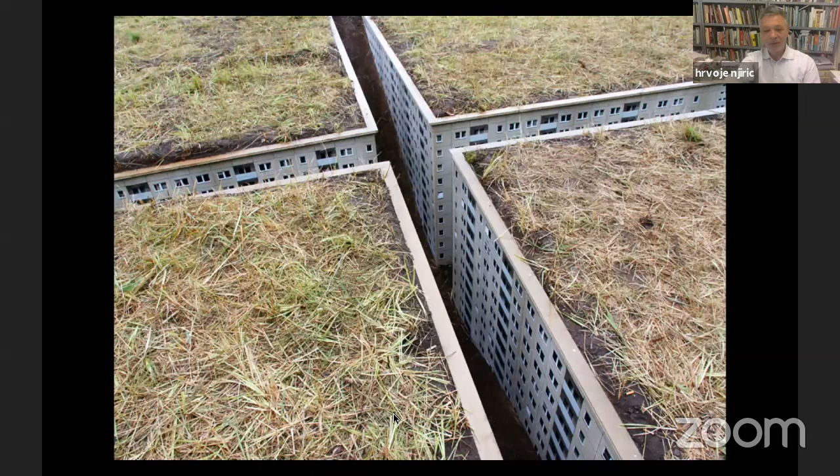These are some works by some German artists who wanted to argue this thesis — that we should be well aware of the scale and that we shouldn't be misguided by the level of elaboration or detailing.

Scale also participates in a public domain. This is the commercial for Unicredito Bank, called Zagreb Bank in Croatia, which gives us a clue how to participate with this small-scale environment of a living room within the public domain. Especially today it becomes very actual, because our living room becomes part of the public domain — you are all now sitting in your rooms, participating in this public debate that we are conducting today. So this idea of small and big, public and private, somehow comes together by virtue of electronic means.

So this small-scale intervention in the city also seemed to attract our attention, and we as architects should be well aware that we can also deal with this small scale.

There are some excerpts from some websites which I find very attractive in terms of stirring up and awakening our attention as architects to the different levels of perception and to different scales and measures. They are not necessarily connected only with Japanese culture, but also with other surroundings where public and private come together, and the idea of different programs that could somehow be combined.

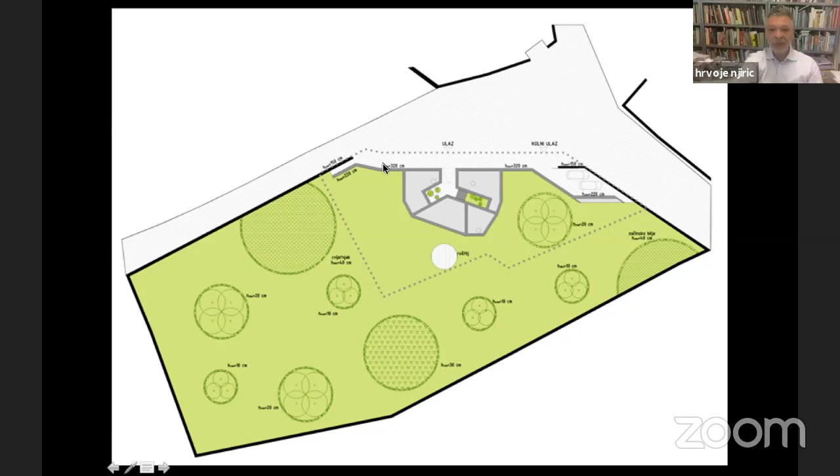So this is actually the site, and we surrounded the site with a stone wall and proposed a house which can be done in one line. You see one line of the stone wall coming here, here, here, here, and also creating ambiguous spaces—those facing outwards, those facing inwards, and so on—all capped with a roof.

So this is the idea of his writing room and some other purposes that you can enjoy by the idea, but doing just one line, just one theme. This is, as I said, a very simple project, but a certain richness comes from this simplicity and how you articulate it in terms of materiality.

So this is the idea of this house. I hope you can see it pretty well in the model now, and with some ideas how the roof might look like. Another example is a little satellite town nearby Zagreb for a little commercial center.

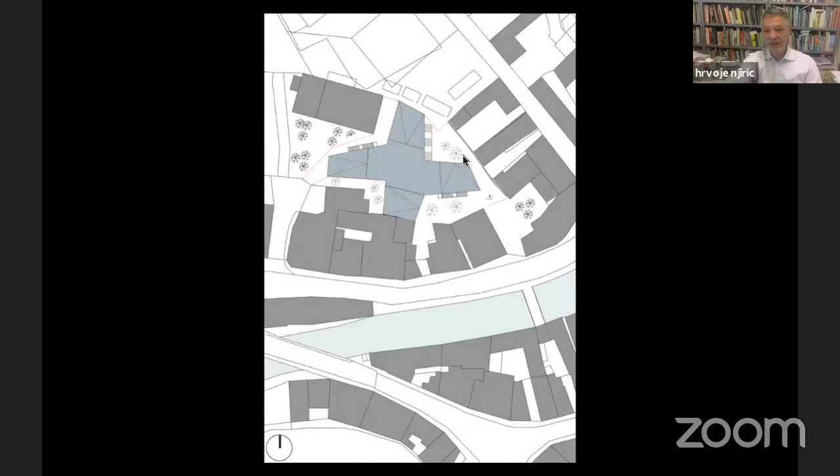Here it was important also to go into this very particular scale of this 19th century city. So we were asked to do this little commercial center, and this is the way how we reacted to that, with these 3 volumes, somehow interpreting the nearby tissue and forming a kind of a public platform for different gatherings in between. So this is how this structure looks like.

Then a project for a church in Rijeka, Fiume. We wanted to also deal with things called everydayness. And this is an image of a church that was made after the Homeland War that we have in 1995. This is one of the nicest examples that we have.

I think this is a very important reading for the students to recognize the beauty of this structure, because it's all made prefab, all made with auxiliary means, but the hierarchy is there, the cross is there, you have the main nave, you have the side naves made of containers, of course. Everything is reduced to this Christian poverty, which is prophesied.

And you have the basilical lighting, if you want, right? So the whole vocabulary is there. It's very simple, it's very straightforward. It's not pretending to be something which is not.

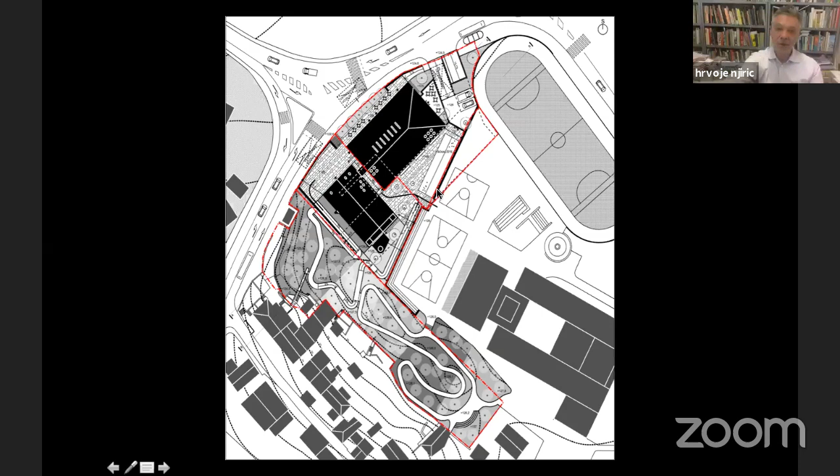So by knowing this, we entered the competition for a new cultural center, like a remodeling of the existing house in Fiume. And this is the project for a new church, somehow forming a kind of ensemble with a public space in between and the passage and so on. So this is how we articulate this very simple archetypal volume in a kind of interplay with this cultural center as a very simple, straightforward structure.

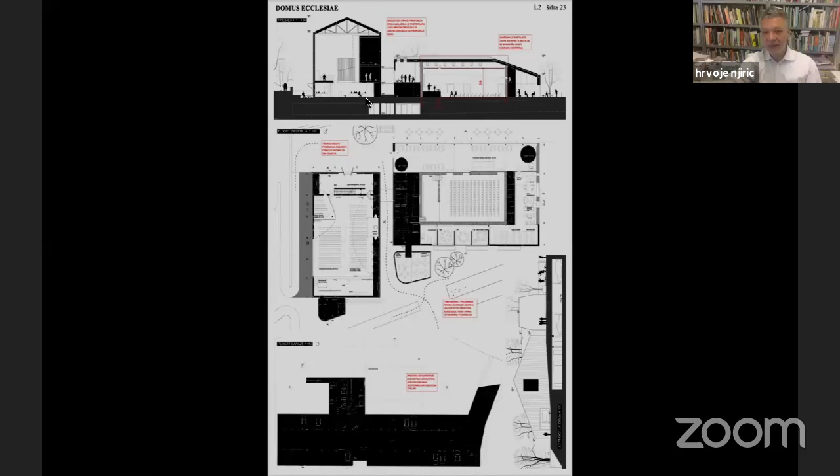It was important that we needed to include the spaces for education of young people within these premises, which are relatively small scale. So we included it on a balcony. You can see this balcony here, which somehow cantilevers the whole interior of the church, which was somehow a shock for the priest. He wasn't really expecting that, and it produces a kind of dynamic space in interior.

So this is the idea of having an archetypal volume and then remodeling it according to the needs, also forming certain areas that have different scale from the ground scale of the whole house, or this balcony for the singers and so on. So these are some images of the interior. Some more drawings. You can see these two forms invading the archetypal rectangle of the church, and with this straightforward, very simple detailing of the house.

So this is the idea of this Sunday morning where everybody comes. Of course, nowadays you cannot see it like this. It was a big debate in Croatia because some of the priests for the Easter opened the churches and didn't want to listen to the bishop or the pope or the politics.

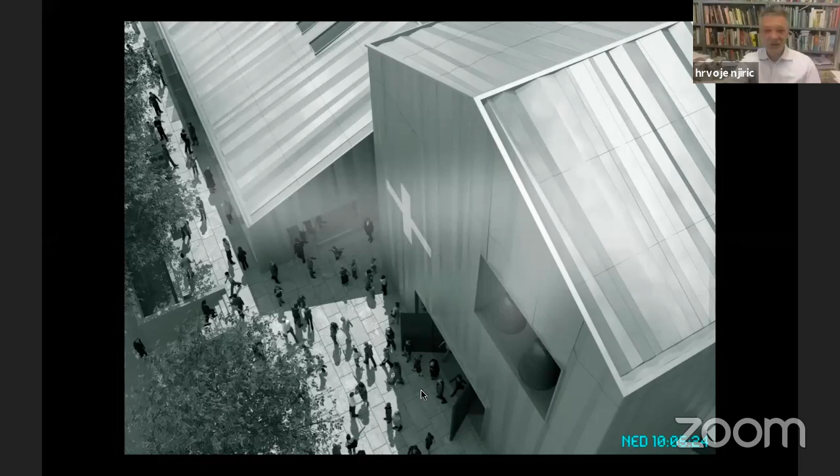They just opened the churches and said who wants to come should come. So this was like a kind of big polemic whether they are doing it right or should they somehow be loyal to what everyone else is doing with this social distancing. But we'll see how this debate is going to end. Anyway, these images will probably be possible sometimes in the future.

Little intervention, also a small one in Zagreb. Here is the Academy of Fine Arts, and they wanted to make a little gallery here. So most of the competitors... it was a nice competition where we were told that Peter Zumthor and some Spanish architects...

Let me remember his name, I cannot remember at the moment. Anyway, it was a competition with good jurors, and we did a lot of effort to make it nice. However, the end of the competition is not so clear how it ended. Zumthor didn't even appear, so it was somehow left for some local architects to decide.

So this is the gap, right? So the most immediate reaction would be to close the gap, right?

But then as architects, we should somehow not forget, and I think it's also very important that I keep telling my students always that our foremost duty is towards the public space.

So if this is the main street in Zagreb, we studied a number of such gaps along the main street and said, okay, this is a chance to make another little public space and to move the house towards the internal part of the block and to make the passage which is necessary for the vehicles and for the pedestrians.

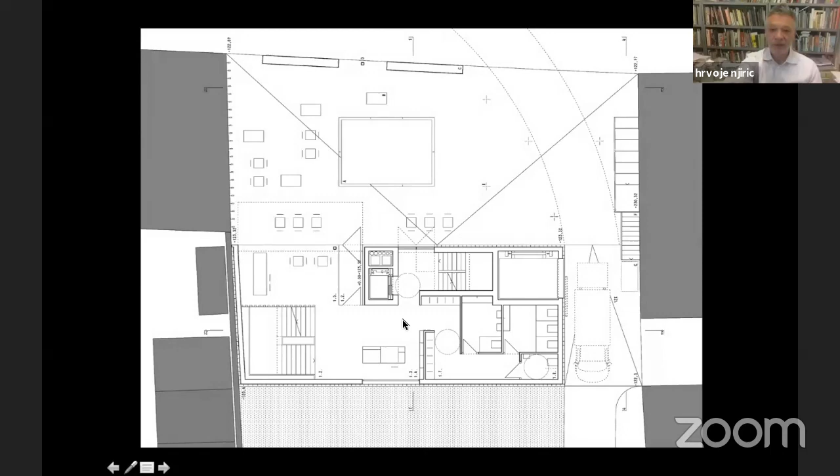So you will see it in a moment. This is the appearance of the house towards the street, or more like this. As you can see, it's entirely like a kind of monolithic volume, like a Stanley Kubrick one, for example, but made out of brick, which goes from dark into light or dissolves in the air.

I'll tell you something about it just now. This is the section. We made a pretty big 1:50 scale model for that. These are the lower galleries. You can see the gallery from this public space, and the other galleries go on across the floors.

So this is this outward part of the gallery, which somehow mediates the arts towards the public domain, which is also a very important issue in arts today.

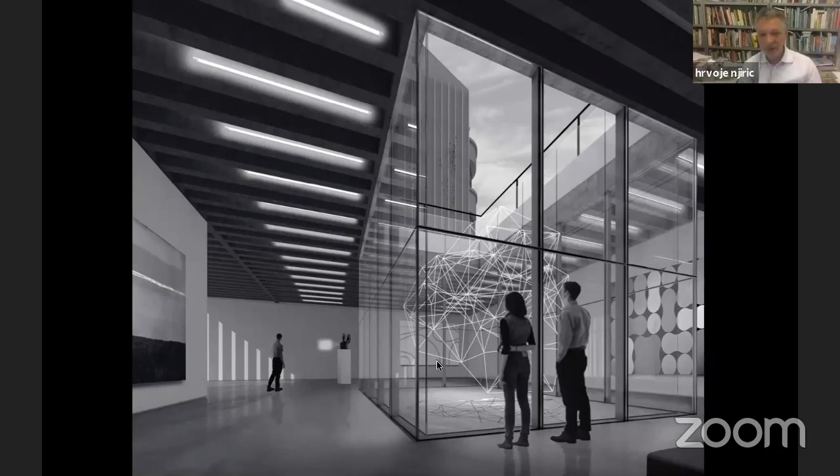So we made a very simple, as Giovanni was saying, a very simple but somewhat complex gesture by making this mute brick wall here, just with a little notion of the entrance here, and with this sort of sunken patio with some sculptures, like an invitation towards the inner inside volumes, and also giving the light into the sunken galleries.

So this is about this wall, the simplicity or the beauty of this brick wall that we wanted to manipulate with this calcium substance, which goes out of the brick. So we studied some chemicals to get into this sort of image from 0 to 100.

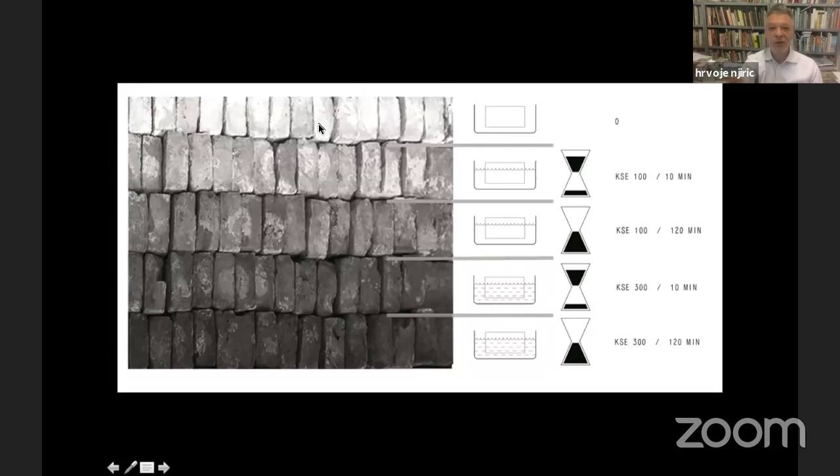And we manipulate with different ingredients, the brick, to have it as it is in this red-orange tone, or to stimulate or to use less sealant to make it more with this white calcium coming out of the brick. So this is the idea of having this gradient by manipulating this very material of the facade.

So this is a kind of a parallel story to the main one related to the public space and articulation of the exhibition space. This is the view from the block towards the outside, towards the street. And this is another image of how this entrance might eventually look like.

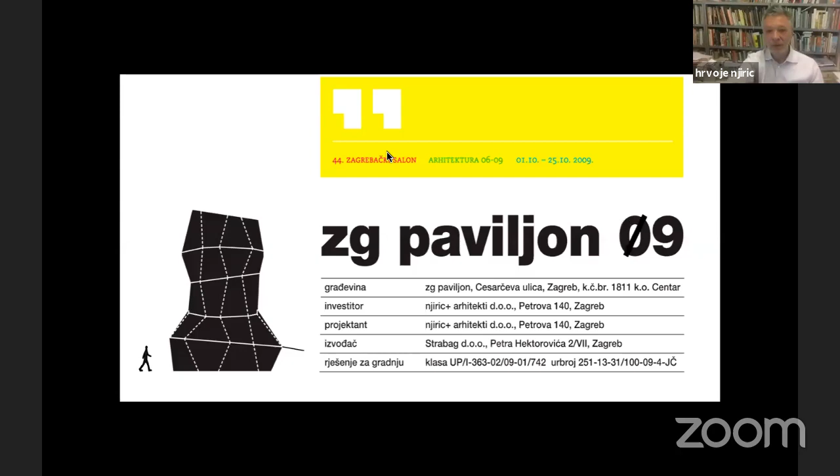Okay, another small project, a pavilion for the vicinity of the main square in Zagreb. It was a pavilion for our Triennale in 2009. So we call it ZG Pavilion 09. This is the position. This is the main square that I have already shown you, and this is the little meadow where we put this pavilion.

This is the position, just looking over to the main square. On the other hand side, towards the cathedral, these are some models.

This is all based on the film by Buster Keaton, 'One Week,' about this monstrous house that happens, where the jealous ex-lover doesn't want this couple to have their new house, but he changes the number of the boxes before the assembly and makes this monster in the end.

So the question is, who changes the numbers on the boxes in Croatian architecture? What is the future of Croatian architecture at all? So by answering these questions, we decided to make it out of two most despised or hated materials, that is rendered extruded polystyrene and plastic windows.

So this is the polystyrene field, this is the plastic windows. We'll make the house with these two materials only, and make it so that none of the windows are alike, giving it this sort of shaky atmosphere.

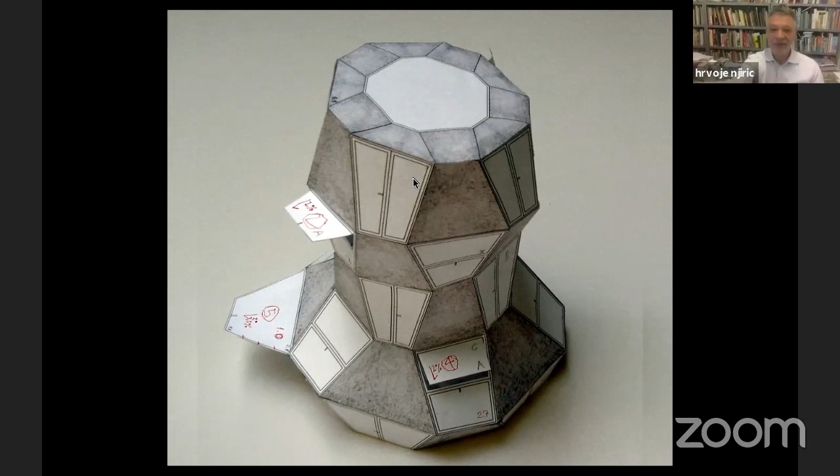It is like a kind of a little tempietto. Bramante comes to mind when you say that, right? So these are some working drawings.

So this is the assembly process by steel construction and wrapping it in these plastic windows and this XPS material.

Towards the final one, you see its view from the main square. It was a temporary pavilion.

It's also a very important device and strategy in architecture that houses should have a certain duration. This number T, time, is very important. I think students should pay a lot of attention to that point, that some of our houses have a very limited duration—in this particular case, 3 months—while in other cases they're meant to last forever. If we take Adolf Loos, he says only tombs and monuments are meant to last forever, and everything else has an expiry date. We should somehow see it in that light.

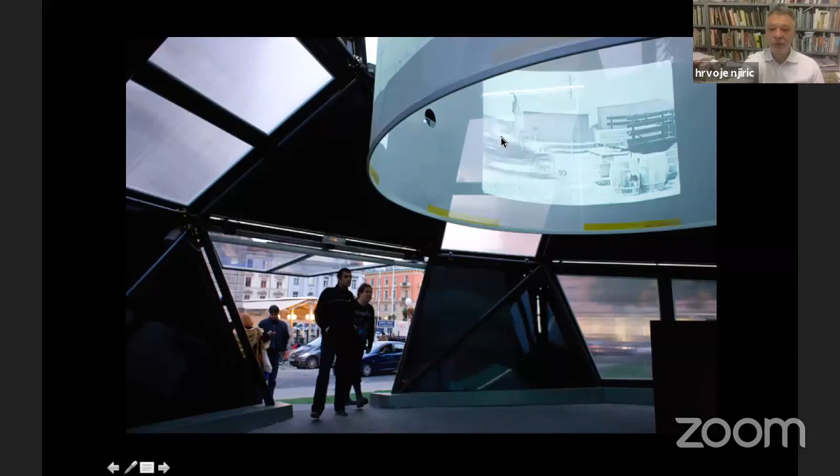Some more images of this house sitting peacefully in the meadow and also housing a lot of public and artist events over these 3 months. A movie by Buster Keaton was also shown in this cylinder, which is inserted into the central part of the building—this kind of pulpit with a sacral appearance, this centrality of church-like spaces, quite intentionally done. There are some nice images of this abstract volume with shadow and light in the height. It was a pretty successful public event in 2009.

Medium scale—we have to hurry up. This is our campus in Split, where I teach. This is the Faculty of Architecture and Civil Engineering, and this is the other part of the campus with this 1970 idea of a new Split, a new Cardo and Decumanus, following the Roman centuriation.

This diagonal part extends all the way here in the planning. Our site for the new law faculty was supposed to be here. It's still in negotiation, still in the process. The idea is that we should somehow articulate the borders with some additional programs, and this is the position of the house.

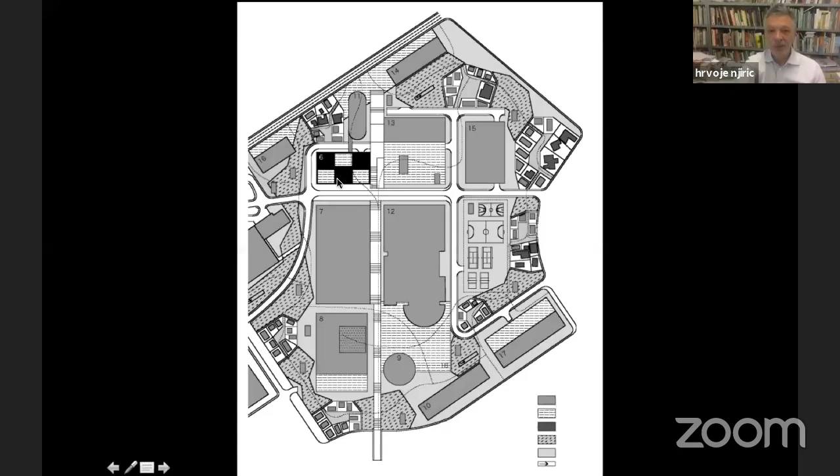Another lesson for students: when you design a house, try to look a bit beyond the limits of the site—make the local border conditions clear before you enter the program of your task. This is the idea: the house with 3 courts, secluded like a version of a Terragni-like space, with shifts and modifications of these internal courtyards across 3 pavilions.

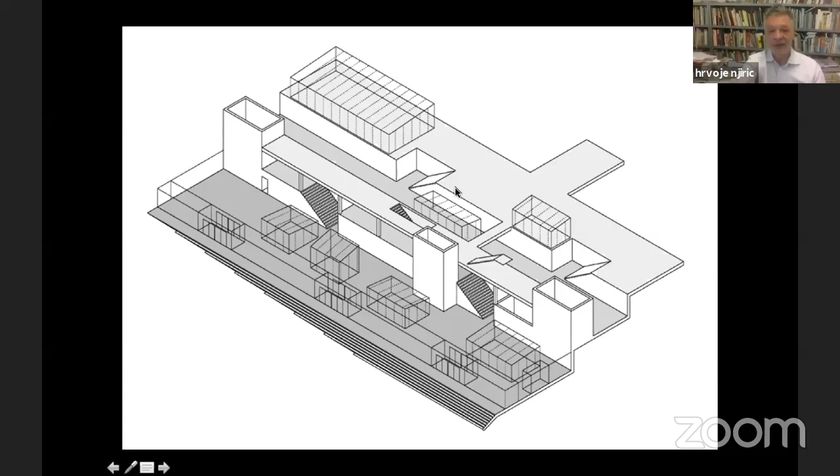Some references for that—I don't want to go into detail now. Some images of that central staircase, which is very important because the site is sloping. So our foyer happens on 3 levels—1, 2, 3. It's a stepped foyer, and you can see it here.

Within the house, with this public domain carved into it, we see this height difference. This is the idea of introducing public space and gradually progressing through to connections with the next faculty, and so on. There are some auditoria cantilevered into the free space of a courtyard—you'll see the plans.

There are some arches, which are very popular in Croatian culture. Every tourist worker wants to attract guests—maybe not Italian guests, but someone keen on seeing the arches. You have a lot of them anyway, so arches happen everywhere and are part of popular culture. We thought, let's deal with these arches—let's do something with them.

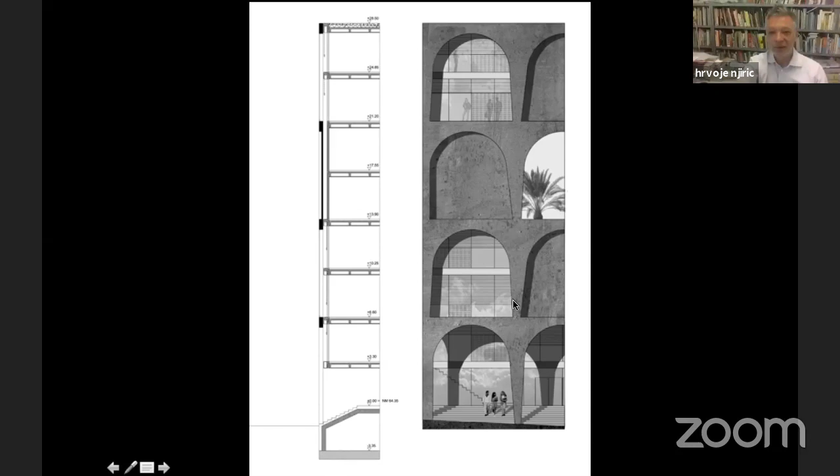First, we made them double height, slightly deformed them, and filled them with different fillings. The lesson is taken from the Diocletian Palace again, where you see Roman arches, 20 centuries old, alongside modern interventions—how the wall was actually remodeled while still retaining these powerful arches as a framework that gives a certain freedom in design. Even the AC units don't compromise the integrity of the whole structure. This was the idea, and this is the most important diagram.

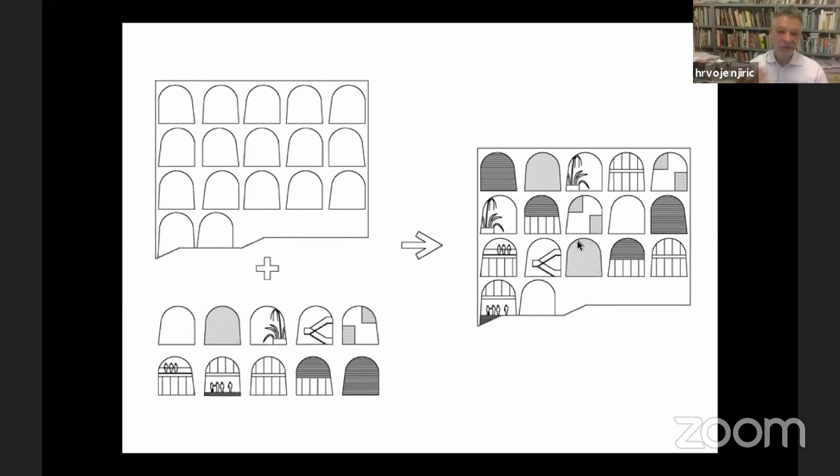This is something that Giovanni was talking about as part of making the ideas as clear as possible. So this is the framework, these are the infills, and you put them in and you make a house. After some time you can close this one and open this one. So the structure and the main articulation remains the same, but according to the needs of the faculty, you can change the insides as you like.

We also use some popular elements to make these very simple boxes. You can call it eventually house within the house. You can learn something about it later on within this internal volume. This is how the house was actually proposed to look from the outside, somehow revealing parts of this internal courtyard with some Mediterranean plants inside.

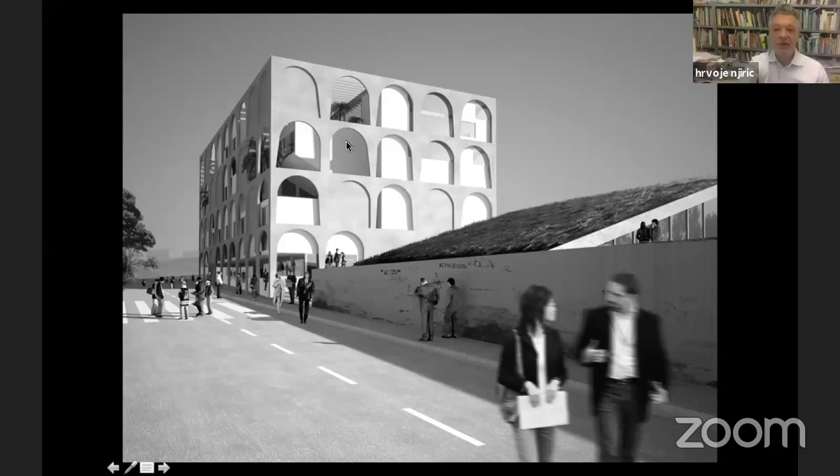Okay, another mid-level building is another faculty for chemistry and pharmaceutics in the city of Zagreb, next to the main cemetery, in a botanical garden. So it was already a second competition for this faculty. The first one we came third. In this one we came second.

So we are hoping to get a third chance to finally win this competition, because in the previous rounds the buildings were not built. Anyway, we thought it was important to somehow include this botanical garden into the house. Actually what we wanted to do is frame the landscape with very subtle means.

We also asked the help of people like Paul Klee, who says building the castle in the forest. So the importance of modern and contemporary art for us as architects is very important. I keep telling it to my students, but none of them understands me. I hope that maybe you as Italians or people studying in Italy might eventually listen to that and try to take inspiration more from art and not only from architects, especially not from the current ones. Try to dig a bit deeper, try to see the different legacy of art in different cultures, and try to make a certain scenario for yourself. This would be my message for that.

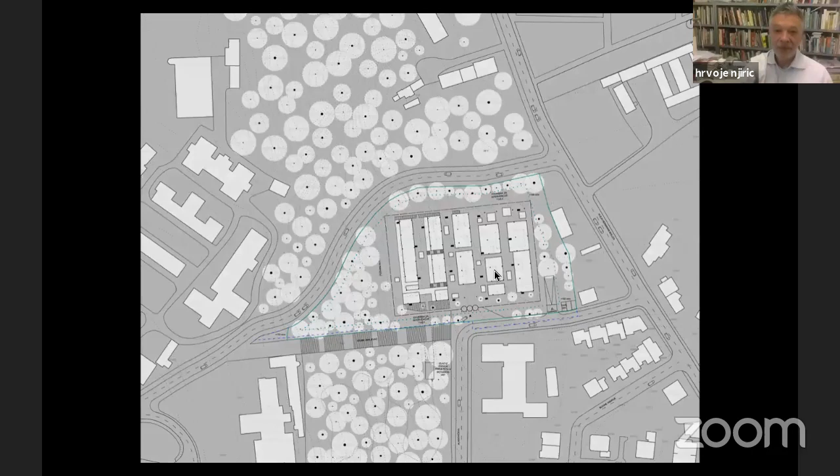Okay, so the idea is that these columns should also have a lot of ingredients, a lot of techniques - I don't want to go into detail, but they are fully installed with all those things. They're not only the structural elements for the main structure, but also for a lot of different things to make the house sustainable. This is the idea.

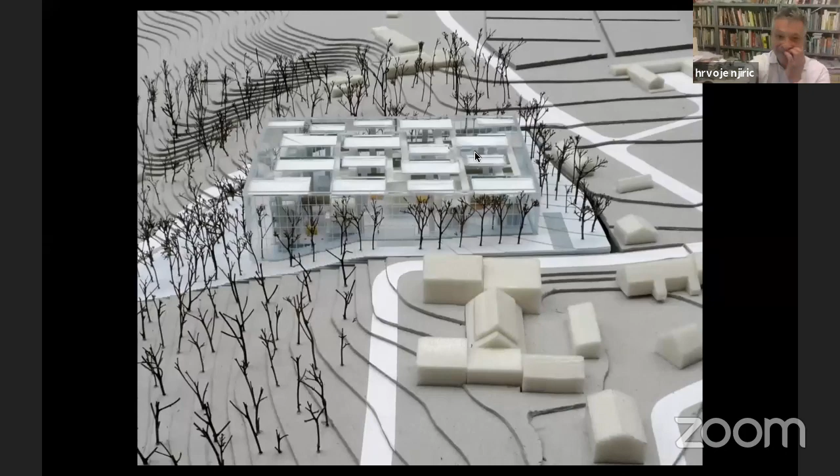So the idea is again about the house within the house. These are images of the construction - they put this table, they construct the house within this former industrial space. So we do the same by inserting these volumes into the structure of mushroom columns, and the rest is made with glass. You see the bit more articulated section with these inserts or implants in the main structure.

The roof and the facade are then doubled, also with a lot of plants, to make a kind of sustainable double filter towards the outside, making it more blend with nature while also working as sun protection and so on. So this is the idea of these volumes within the main structure.

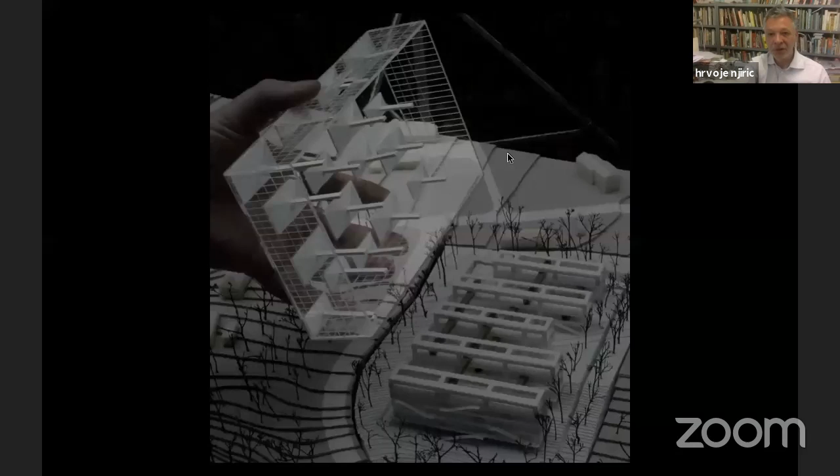And the idea of having the slope of the existing meadow inserted into the house, so the floor is gradually going up or falling down. So when you enter the building and see these columns and this sloping floor, you should somehow have this feeling of walking through somewhat altered nature, but still the nature or the woods.

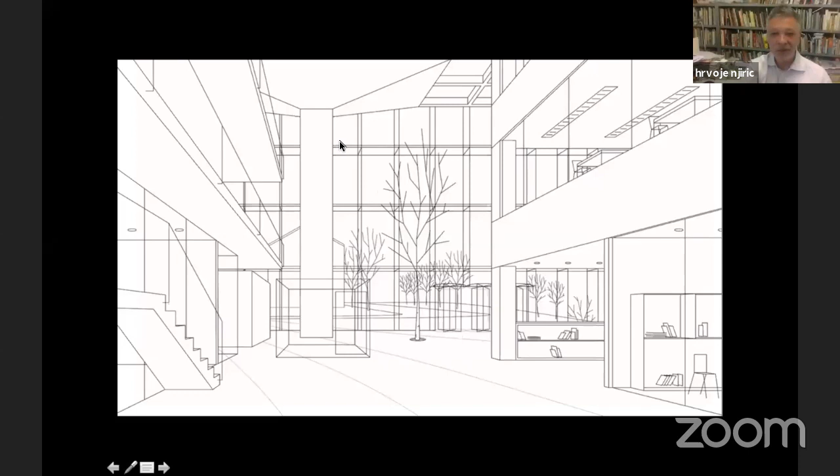So these are some of the images of the inside, the very simple ones. These are the perspectives that we like in our studio. At the end, I will show you some more commercial ones that we have to do for some competitions, but my message for the students would be: make such drawings. For the architects, they will do. We don't need to wrap it with all possible materials and shadows to give you an idea what the space looks like. I know that for competitions and maybe for some of your teachers it's better to do the real rendering, but try to stay away from it if you can.

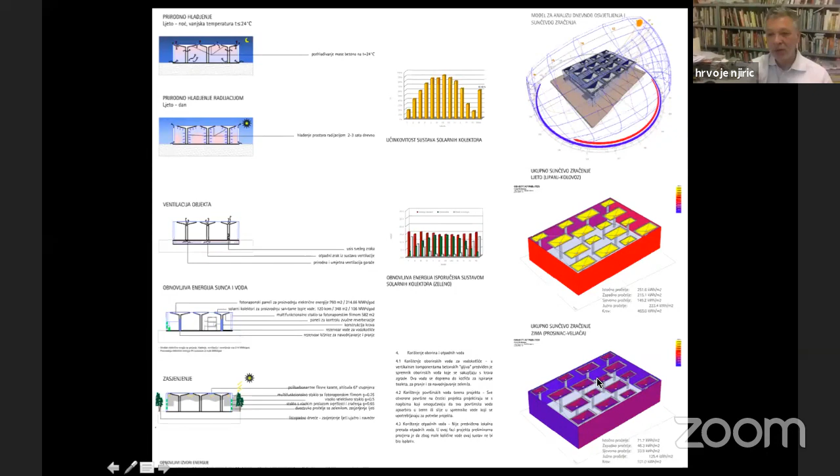So some more drawings of this, of the structure, which is, I think, pretty clear, and how it sits in the landscape with this sort of descending staircase, always related to the very outside of the building, and so on. We have some examples with so-called CFD analysis, where we try to control the flows of heat and other media within the house, where these mushrooms are also performing as such elements, giving a good temperature in the summer or in the winter. I cannot go into detail with that now. This is the final image of this.

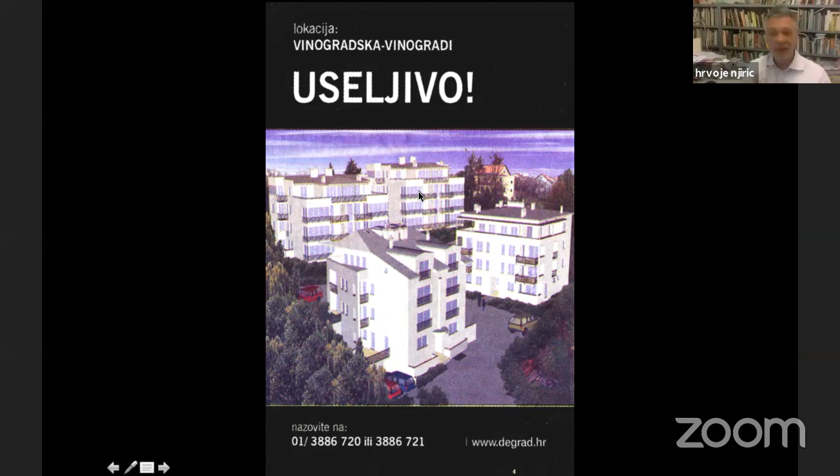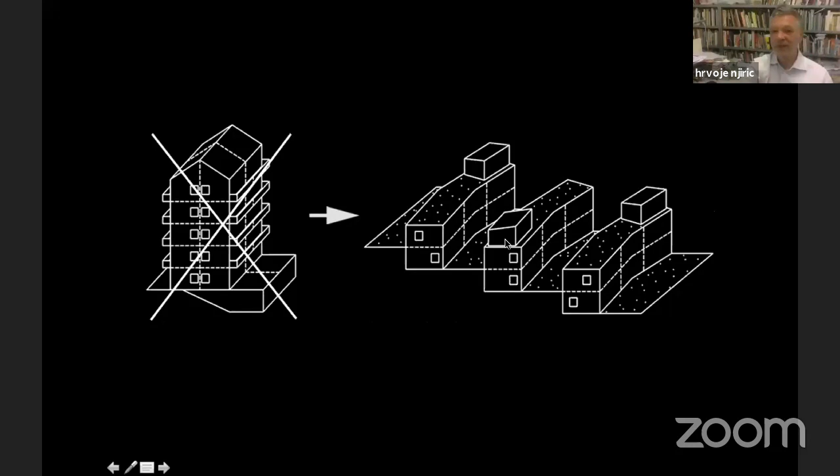This is something that we did more than 10 years ago for a housing settlement. This was one of the questions, as far as I can remember, from Tommaso, what we do. So this is a kind of commercial building that is done in the green outskirts of the city of Zagreb, and we wanted to oppose that by saying no to this and yes to this sort of landscaped stripes, or ribbons if you want.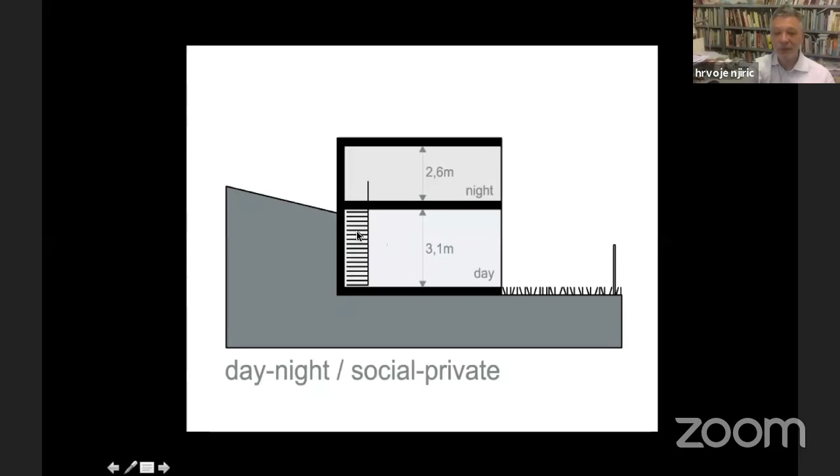We have to speed up a bit if you want to see everything.

Another example, for the gypsies. This is the Gypsy Settlement, a very, I would say, illegal one, almost entirely made without building permits. So the municipality of Zagreb wanted to have a kind of cultural center for the gypsies, with a police station, with a gym, with a medical center and so on. So this is how the gypsies construct.

So when the competition was launched, it was an empty site, but the gypsies, as they are, invaded the site in between with their houses, and these are the limits of the site. So what can we do then?

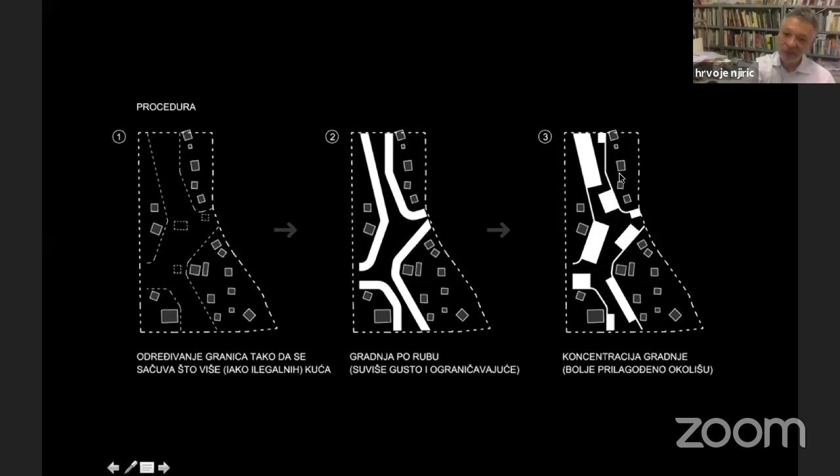We wanted to make an amnesty for this building, so we wanted to insert the center in between these houses, right? And by doing that, we had to demolish some of them, but the rest remained there. So we inserted the programs within the structure, first as bands, which proved to be too thin, and then we articulated a bit more with real houses, again with emphasis on the public space in between them. So this is how it looks in the plan or in the model. You see this generous public space, which will be then also elaborated as it should. This is kind of an empty stage for the gypsies, for their festivities and for their way of living.

But know that the buildings are very simple industrial shacks, made with a very simple idea. And again, the emphasis is on the public space and on this procedure of making illegal, legal living next to each other. Let me just show you this image again.

Because this wall delineates but still connects the existing illegal houses with the public space. So this is maybe the most important image which combines these two realities into one.

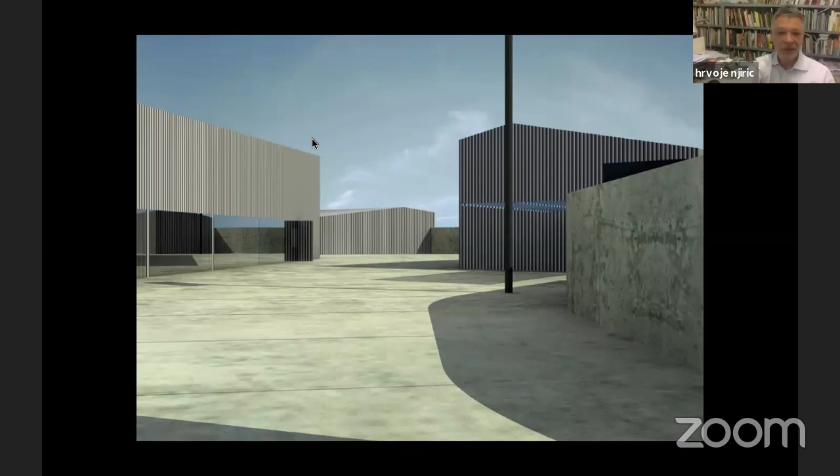Design is not so important, so I hope your teachers are also telling you that strategic thinking is much more important than articulating a house down to the last bolt or screw. So this is about the people who stand in the front row.

This is another housing settlement that we did, where the earthquake struck the strongest. The earthquake was here, 3 kilometers below this point, so it was the most struck part of Zagreb. And we had this site with these two little water flows here.

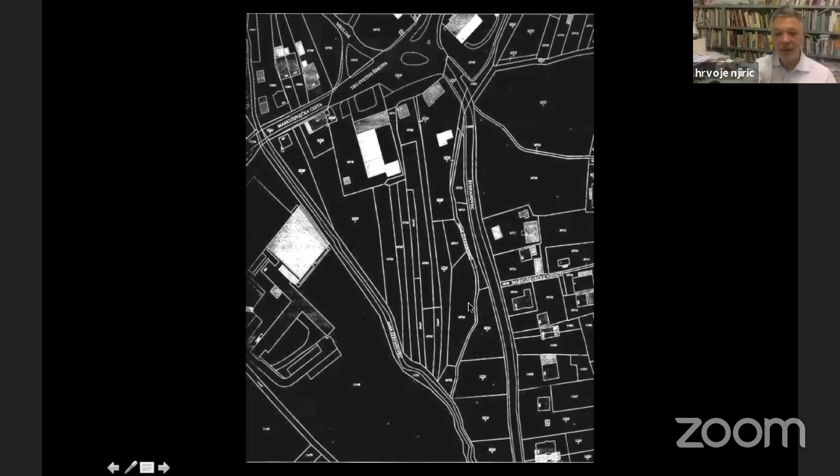Here were also envisaged buildings like blocks, where we manipulated the standard typology towards semi-detached housing. Then we manipulated them again to arrive at something we call rural mat — mat in terms of the Smithsons' legacy of having very compact, clearly formed flat structures.

And we call it collective housing, individual housing in the group, so it has the quality of an individual house. This is the process of manipulating this archetypal form towards what we call rural mat — rural because it's in the rural setting on the outskirts of Zagreb.

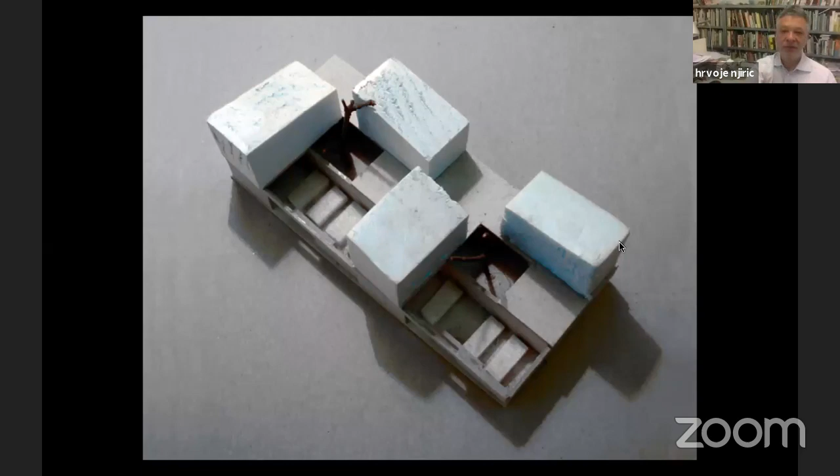So this is one of these mats, and this is how they sit on the site — this side is lower than that side. So everyone has either a garden, a terrace, or a front garden as their own enlargement of the living space, with some barbecue elements here.

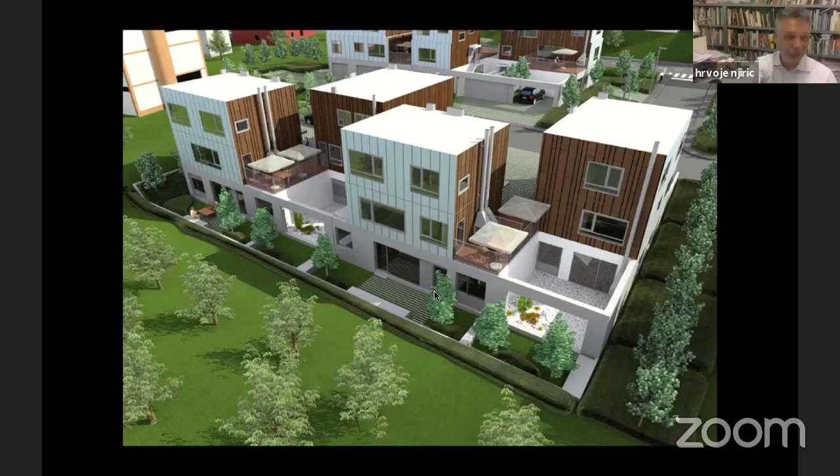So this is the structure. We also designed the barbecue for them. Some more images — these are the renderings we're not very fond of, but we have to make them for the selling catalogs.

What was very important for us was the scale of this little village settlement, which became part of the sprawl of Zagreb, with these small-scale elements inserted along something we call semi-public space in between.

So these are some images of the buildings, not always having a reference point of a church in the center of the settlement, with these carports where we took half the cars away from the public space.

This sort of space in between where people can gather and meet. And some images of the elevation.

Okay, now we go to the bigger scale projects. The first one is a campus in Zadar, the former military site here. This is the historic core of Zadar, and we had to remodel this into something else.

So we did a master plan, taking these stripes from the 50s with these family houses from the 30s, and combined them together on this site. Again, public space as a kind of spine, the faculties, the little villas for postgraduates and professors, and all inclined programs — 1, 2, 3, 4 are the public programs.

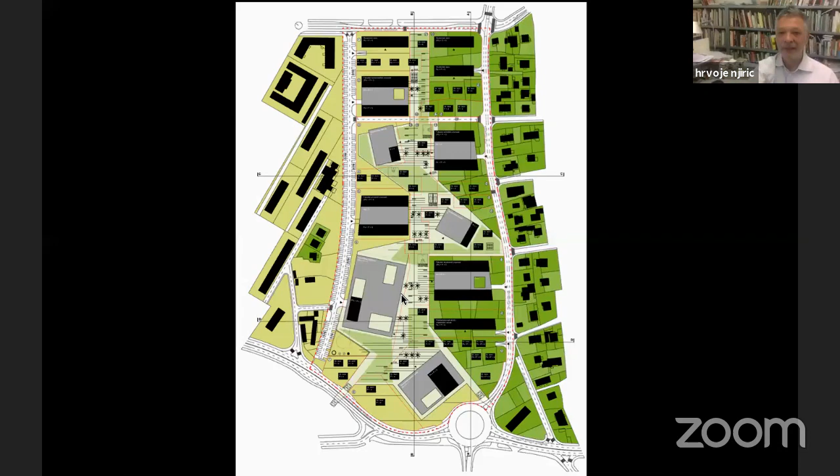Concentrating on this one, which is a new university library, because the competition was called for the library and the urban planning. I'll show you some details of the library — the idea that the library can become a hotel or a market or a mall, the idea of Aldo Rossi's Architettura Autonoma, where in the same frame you can think of different functions over time.

So we said the house can be everything. Let's design a sequence of nice spaces with some courtyards, and they might eventually be a library at a certain point, and later on the city can assign them to other programs.

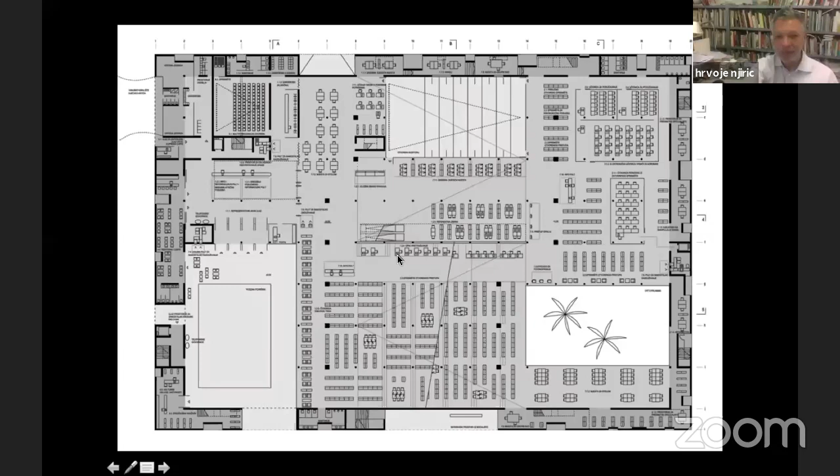The idea of a highly installed perimeter, the in-between space with 3 courtyards, and a kind of progressing ramp, which makes a loop within the building.

This is the building which we wanted to design as a timeless and scaleless building. You cannot tell the scale of this building because the human figure is that tall. We wanted to make something that somehow escapes the scale, so we can use the scale in this way.

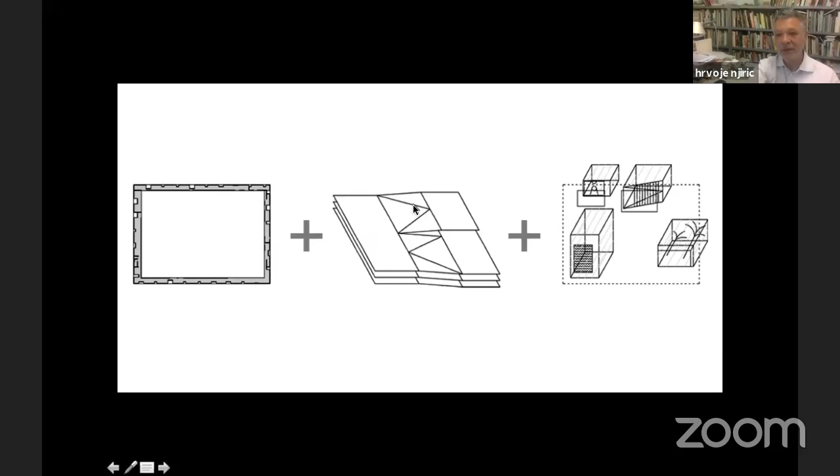This is the diagram of these 3 elements: the perimeter, the communication, and the courtyards. One of the courtyards, some other courtyards, the structure of these walls, which makes the big spans possible.

And finally, the big projects. Maybe we won't be able to make it on time, so I'll try to make it a bit shorter. Let's skip to some other ones.

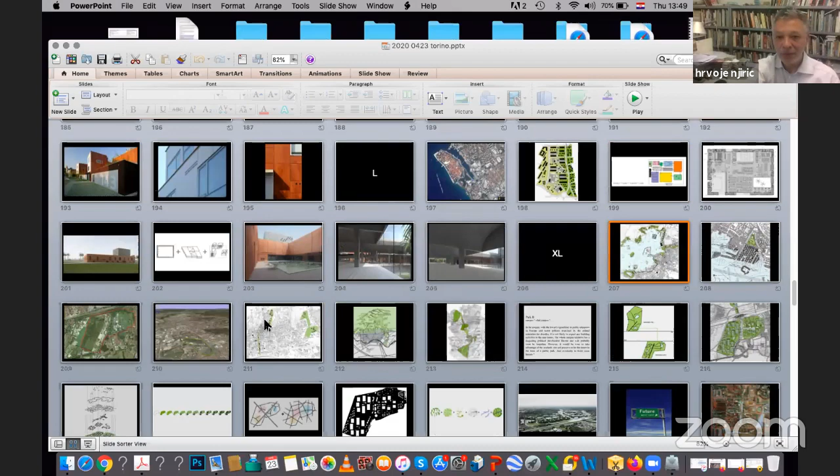So I wanted to show you — we have 10 minutes more — so I will skip these two campus projects for Pula and for Zagreb, and I will show you the more current work.

This is the one again for Zadar. It was the market place for Zadar. And why doesn't it work?

Some error appeared. So is someone going to help? I don't know what happened. Just a moment, please.

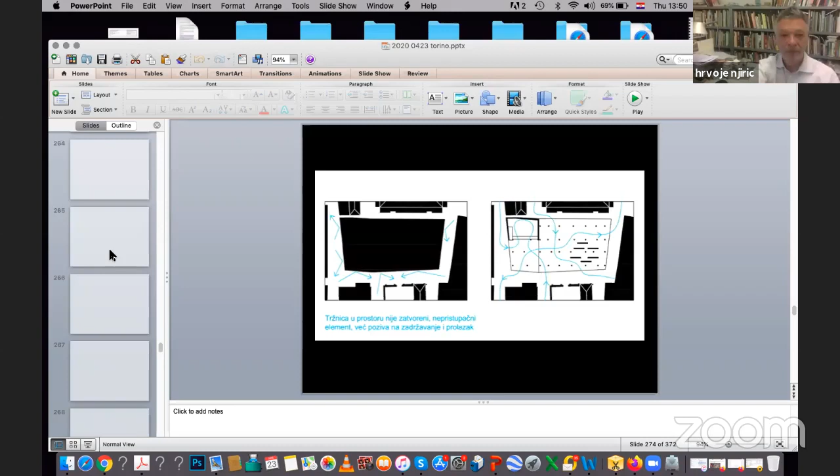Let me see, over here. Okay, let's try again. I hope you can see it. If something is wrong, Giovanni, please call me on the phone so I can adapt.

I hope it's okay. So we call it the field of possibilities. As you can see, we designed the market as rows of columns and beams atop it. There's a lot of Roman history in the city of Zadar, or Zara, and also a trace of rationalist fascist architecture from that period. So with this neo-rationalist approach, we wanted to address all these issues, and we also wanted to address time.

After some years, there will only be these columns and beams, which people won't be able to recognize when they were made or for what purpose they were made. So this is the idea of having a very autonomous structure.

We studied all the formats of the squares in Zadar, starting from the big one with St. Donat's Church, and some other smaller ones. This is the format of our marketplace, which already exists on this place, next to the city gate, where there's a big fortification wall, a medieval structure around the city.

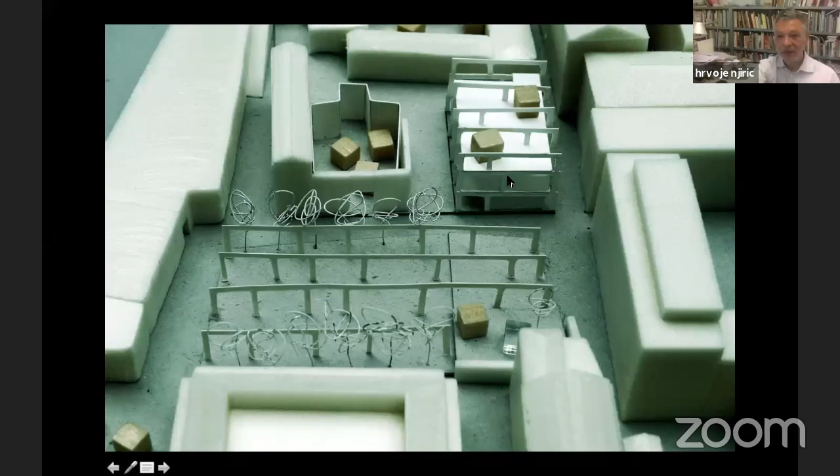This is the idea of having these stripes and some emphasis within these stripes. Let me go into this again, with some programs that would make it a bit less homogeneous. This is the idea—you can see it also in this image.

We wanted to say no to this fixed roof, which a lot of competitors did. We won this competition, and we want to make a kind of fluent structure which permits a lot of moving around it. And I wanted to show you some references.

This is a part of our competition booklet, citing Sol LeWitt, Paul Klee, Giacometti, Donald Judd, Stonehenge, Sol LeWitt again, Terragni, Donald Judd, and so on.

Some more references, even Plečnik, which I remembered, Cordoba, and so on—a lot of influences, and Terragni again.

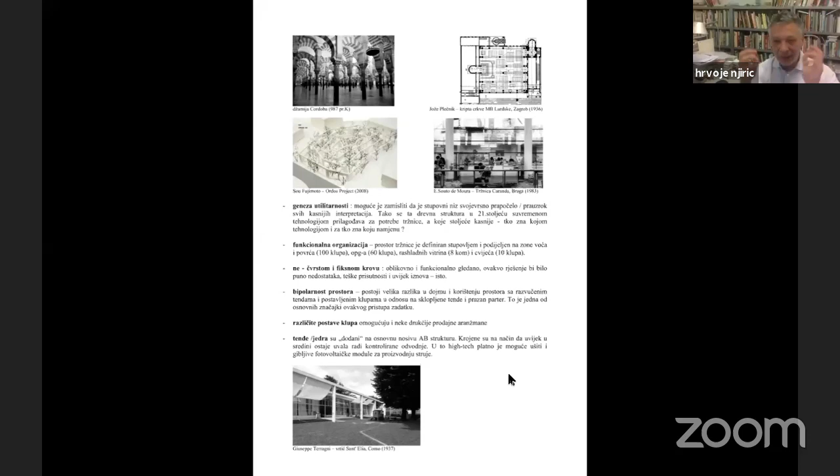A lot of influences. I think for the students it's interesting to see how projects come onto the paper or into the computer by knowing—I'd stress the word know. You should equip yourself with knowledge, and then it comes out at a certain point. So these are the references.

This is the project. These are some influences from South America. This is the idea of the roof—the textile roof within these lines of concrete columns, and by motors, by engines, you can move it, right?

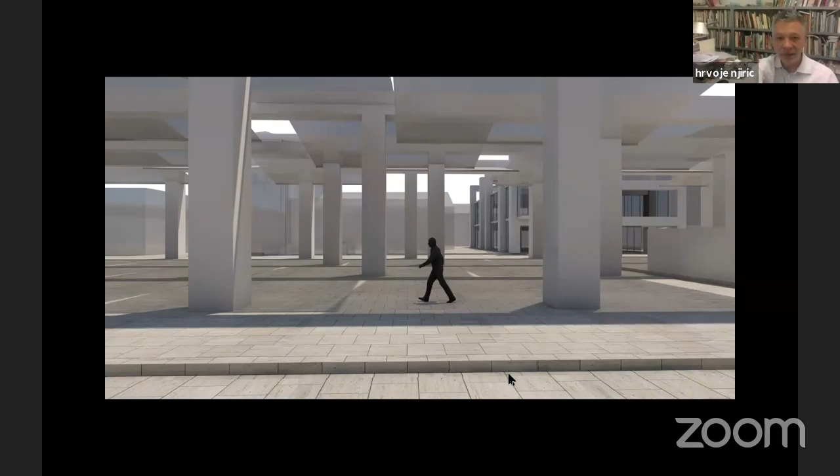So these are some probes on the model, again showing this idea of three focal points, the idea of walking within these mighty 80 by 80 concrete columns, and the idea of not having a closed house, but a kind of permeable structure.

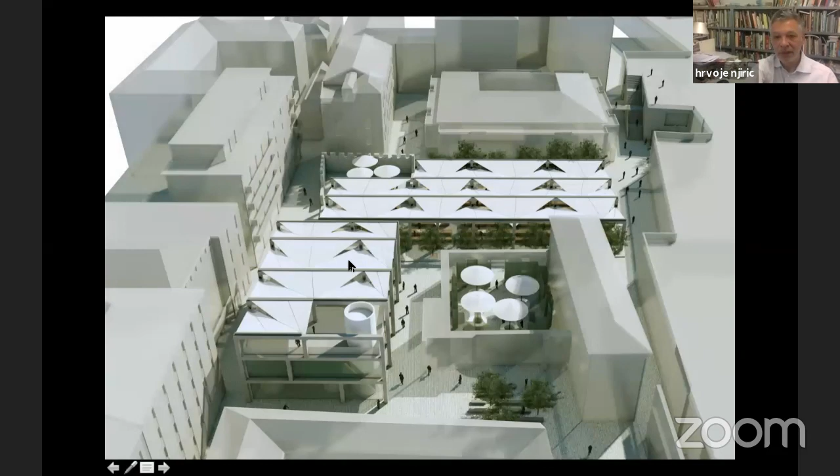So this is a more articulated model of the big house and the very green market as it should be.

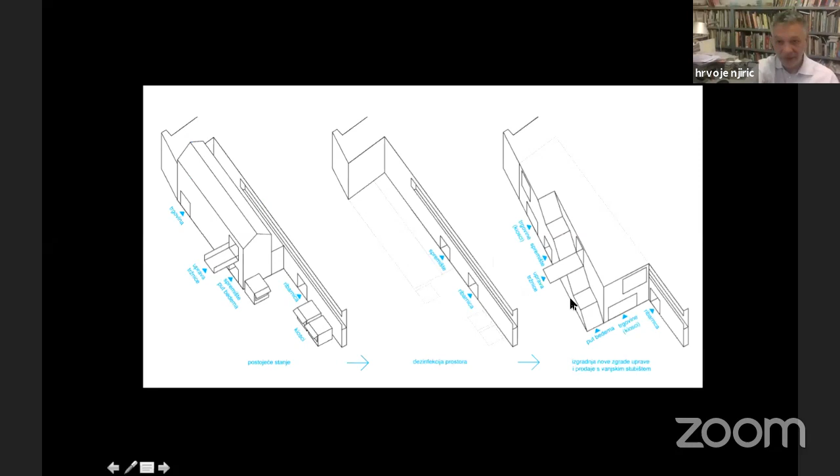How we recreate the existing fortified perimeter with a new staircase—as I said, we adjust certain border conditions for our projects, dealing with this borderline by making it different and adding this new staircase. This was not part of the competition, but we felt we had to deal with it again.

And this is the very market itself with these lines. We are in the course of elaborating the project. There is a pretty well-known design firm called Numen For Use, who designed the benches and all the furniture for this project.

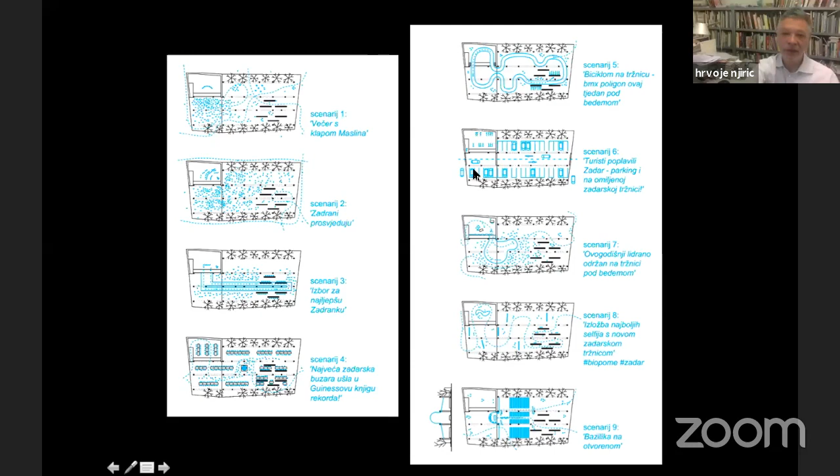These are some festivities that can be organized here when the market is not working, along with some ideas of the lighting concepts—when the canopies, when the textile, are completely on the beams, in the cylinders.

The idea is that this remains as if it were made in the 9th century. In the 21st century, make this textile roof. And in the 23rd century, there might be something completely different being placed again on this common denominator that progresses from the 9th century towards the future. So this is a kind of an idea.

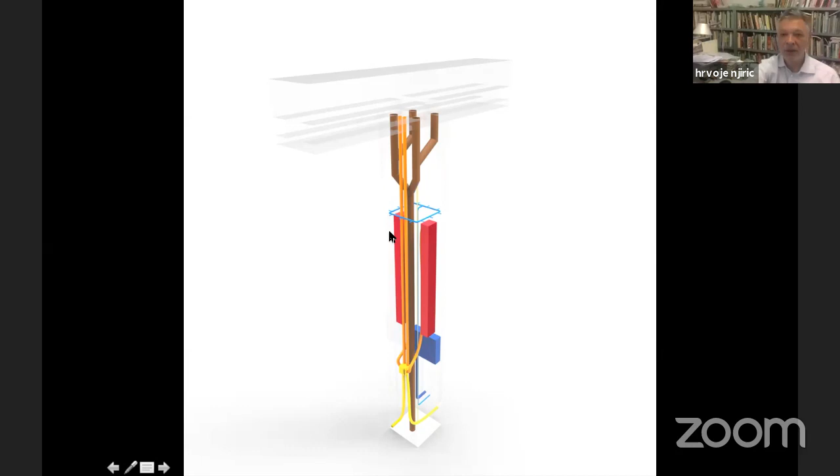And these are the columns, the insides of the columns, like the body with organs, with these heating elements that cantilever, sprinklers for summer cooling, drainage of the roof, water, electricity, and so on, different functions all packed into this column. So this is a kind of engineering challenge, to make it within the column and use these prefab columns on the site.

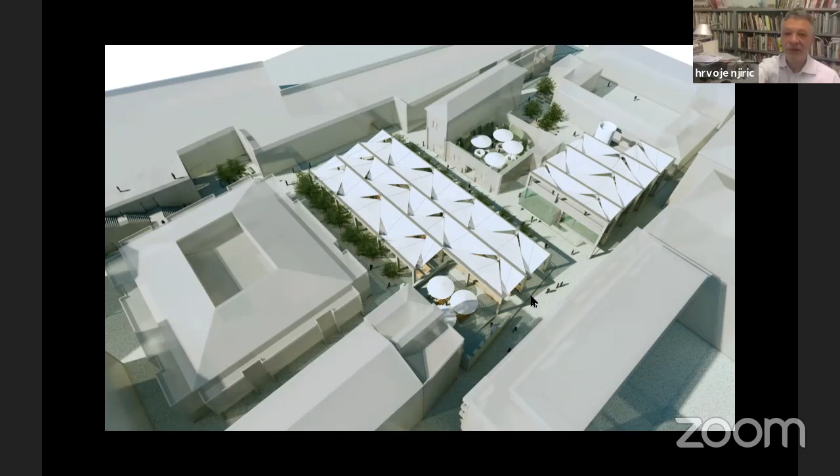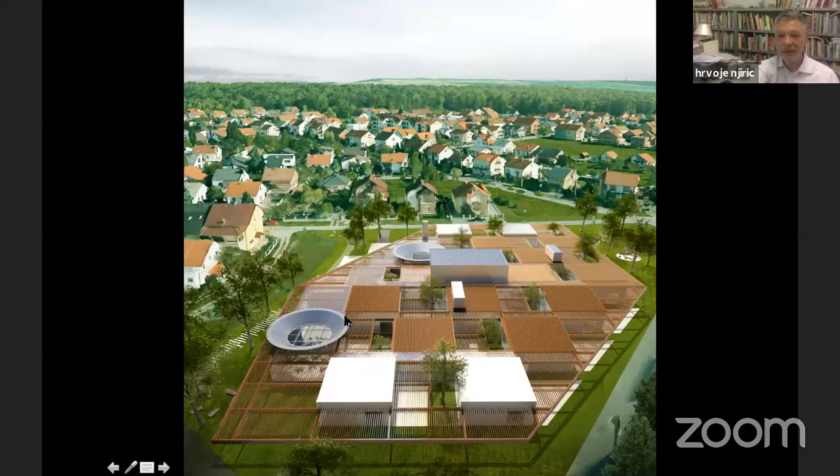This was the idea because it's a rural setting, and we wanted to use this vocabulary of a mighty protective roof towards these little chickens. This is the idea of having this structure related to this semi-city-like, semi-rural setting, by having a strong structure that unifies the whole setting, with entrances, a multi-purpose hall, installation units and things like this on the roof, with different articulations of the roof. I will talk about it just now.

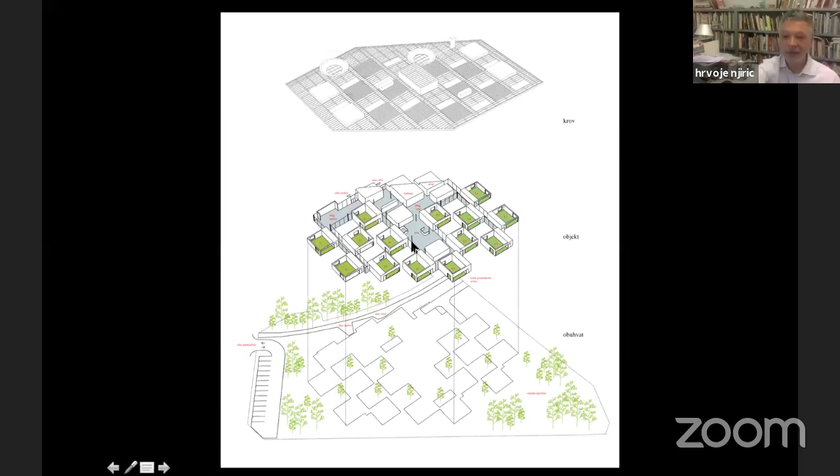So this is the structure, and this is the pergola part, this canopy. The entrance into the kindergarten, the structure, how it lands on the site, and the roof, like three elements. Some more images: this is the plan with these central parts, with entrances from the north, and every unit has its covered part, uncovered part, and closed part.

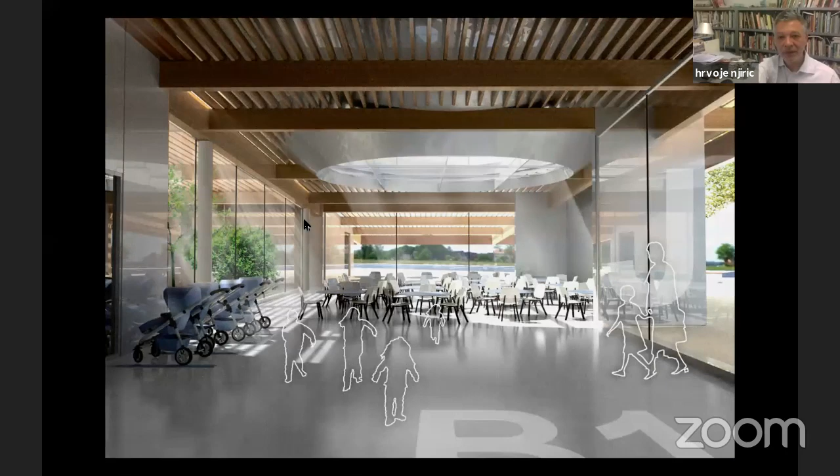So the roof has different articulations, as you can see. Some sections, some internal things, the multi-purpose room, more sections, one of the units. And this is an important part: within this repeating structure, you can elevate to make higher volumes, leave it open, glaze it, cut it out, or cover it with some metal. So these are the interpretations of the very same roof according to the needs below it. So this is the final image of the project.

Two more to go, three more to go. Okay, I hope it's okay to extend a bit. We made two swimming facilities.

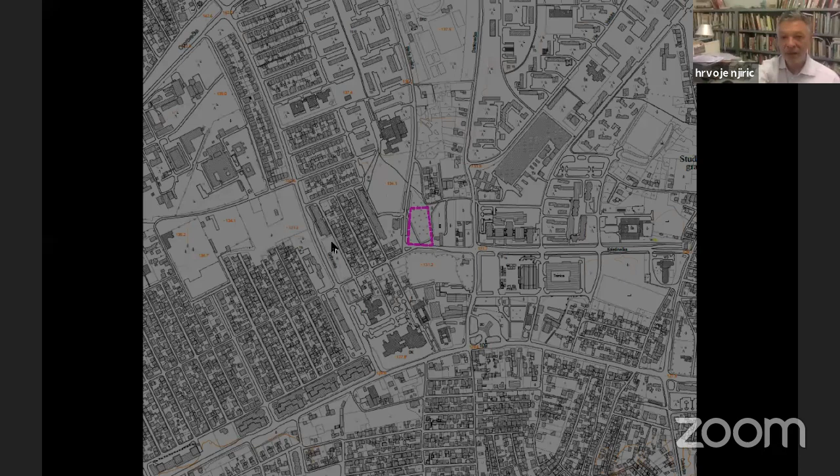This is the one that we almost won in the workers' part of Zagreb, where there are a lot of commercial centers like Lidl, Kaufland, Spar, Interspar, things like that. So we said we'll add something like that to this already existing landscape of facilities in this part of the city. We'll make this Kaufland or Lidl-like very banal roof, and put the swimming pool inside these pits. This was the idea.

So this is the roof, this is the ramp going into this pit. And as you can see, the site is less than necessary, right? So this is the idea of having this ramp as a public thing with a lot of events. And then you have the pool, and then you have the roof. This is the idea. You can see the ramp, the pool, the auxiliary things.

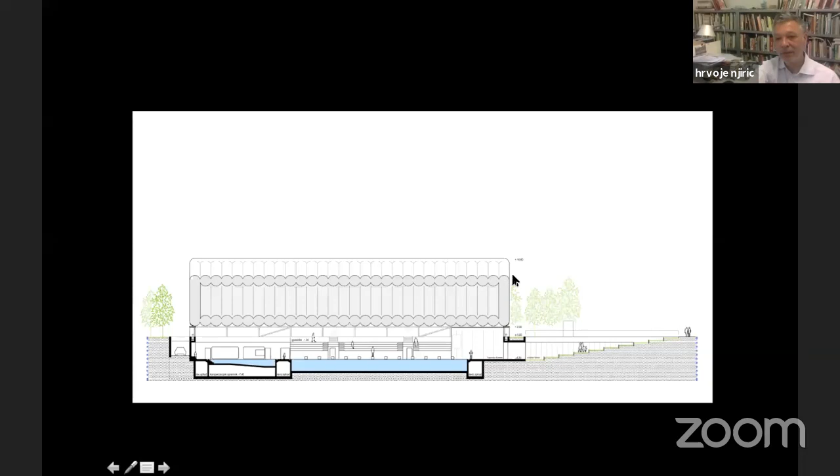The roof is made out of inflatable fabric, which mimics the idea of this little banal building. This is the ramp that takes you down, and you see the swimming pool already. So the idea is that you can do this roof now, and in 10 years' time, someone else can design the roof, or in 20 years' time, someone else can design the roof. This is what we call infrastructure remaining the same, but the shape changes according to the very needs or the fashion.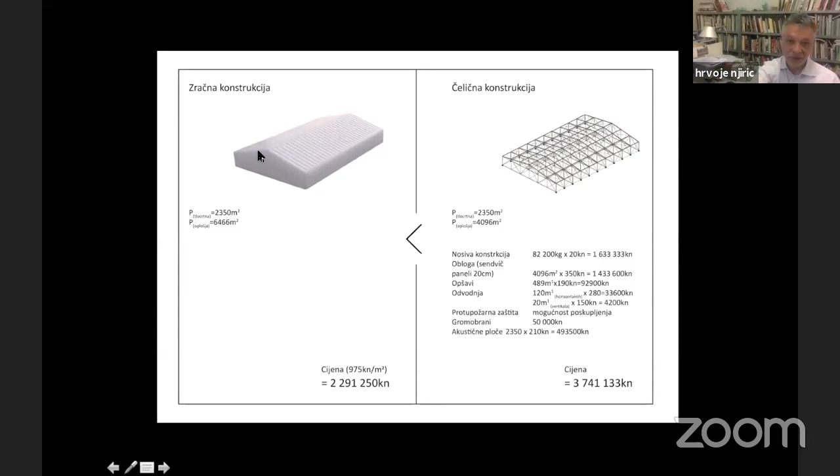We studied it compared to the standard construction, and the price is better. So we somehow took this because this roof is easy to be done. See it here.

The internal part, the pool area, is very simple, straightforward planning with this ramp going up, or a platform if you want. This is the inside of the pool, and the installations are placed around the perimeter, because you cannot put any installations on this inflatable roof. So we have to provide that all the installations, the lighting, the heating, the cooling, the ventilation, sprinklers, should all be somehow in the perimeter, so that the roof is completely autonomous.

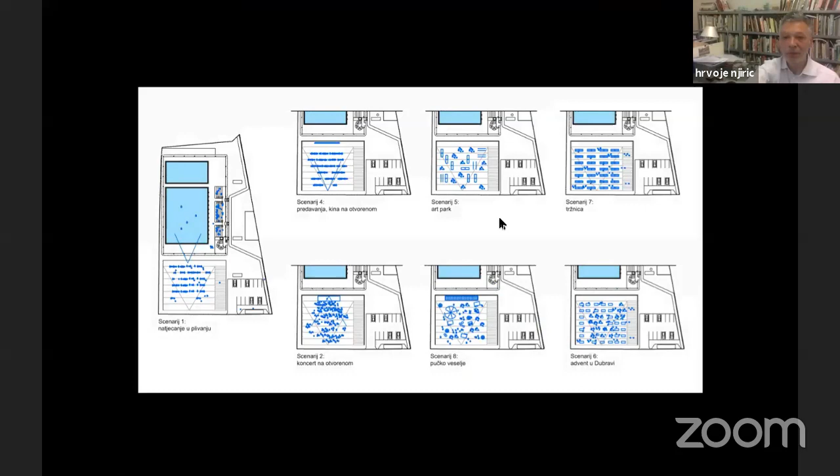This was the idea. And this is this upper part with the stands and different events that you can perform in this sloping site. So this is the public part of the program that we give to the city. We call the project the social pool.

So this is the idea of having these different roofs and a connection bridge to this part of the city, because you cannot pass it here, it's a heavily trafficked street. So we designed the bridge here, which was also part of a kind of environmental plan. So we somehow interpreted it as a house with the bridge.

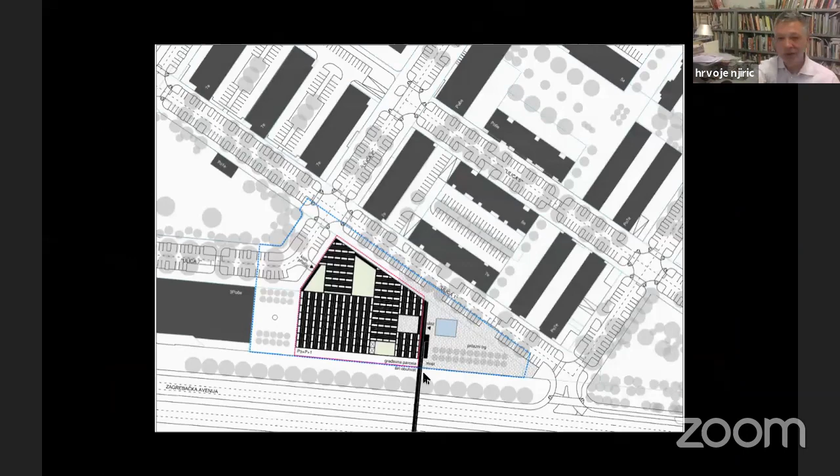So this is the project with these different roofs, with a billboard facing the street, with a roof, with a bridge incorporated into the fabric of the building.

Again, the idea of, we had to cut the light wells out of this building because the perimeter was fixed and we couldn't do anything else. It may look to you like we always do the same thing, but in this particular case, we had to deal with cutting it within this perimeter, which was already designated to us.

So the roof, the ceiling, these are the implants that I will talk about just now, the circulation, and the water itself. We call it the bathhouse more than the swimming pool.

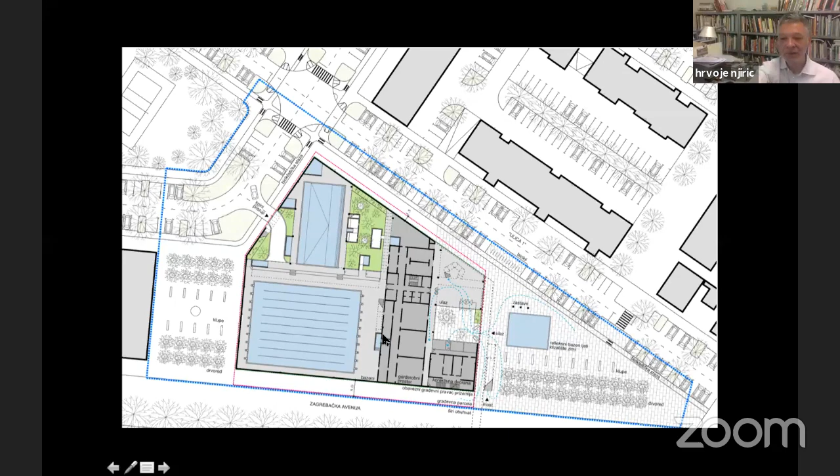We are now designing this square as again the entrance, you enter through this procedure, and you have these two pools and ten of these blue boxes. We call them spa spots.

So this is the entrance part with the bridge, with the billboard, which actually serves as a staircase for this facility here, for the tube.

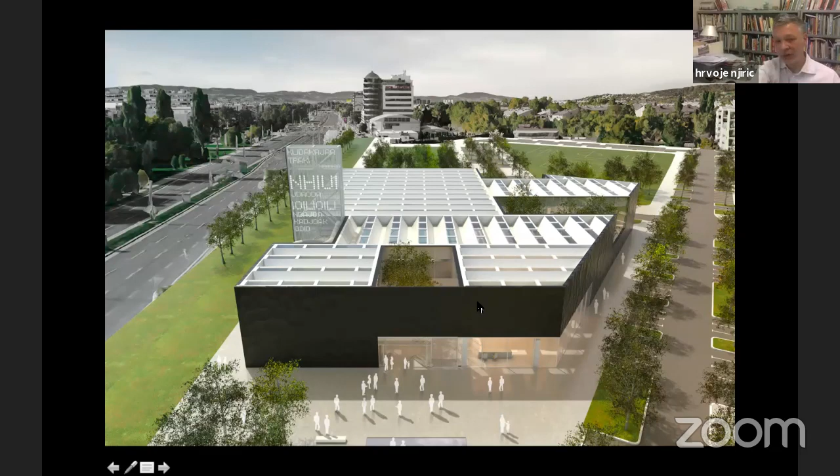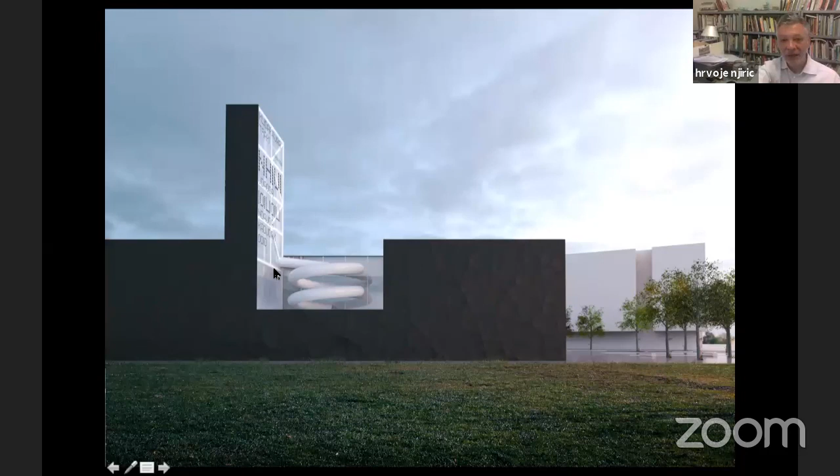We will also offer this, because we wanted to show it as they actually expected it to have. You have this ceiling, which will be—you see the billboard, how it functions within this spiral tube for swimmers.

We say within this structure, we'll make these blue spots like a kind of experience space with different temperatures, water facilities, and things like that, to make the bathing a kind of unique experience, not only for the grown-ups, but for the children as well.

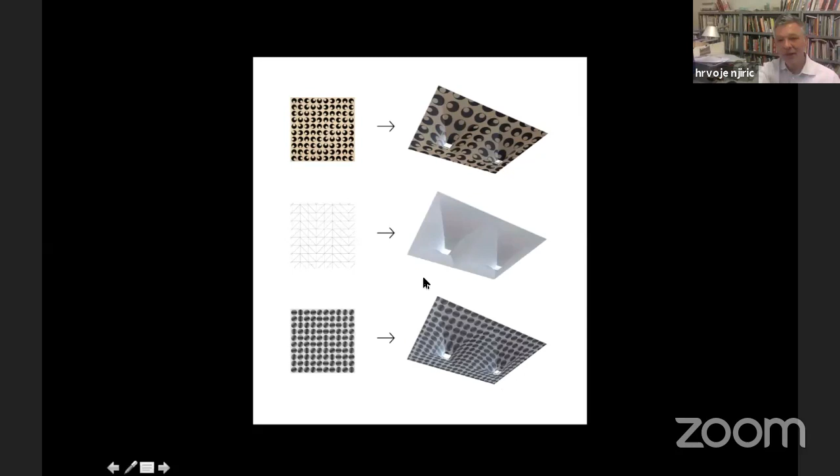And we wanted also to continue the legacy of bathhouses, let's say from Budapest, by applying some contemporary Croatian art to this fabric, which will be suspended from the ceiling. So this is the idea of introducing this level of art within the building.

So this is a steamy, somewhat mysterious environment that we want to create here. And the final project is a tiny one, but we are happy because we won it—we won it 3 weeks ago. It's a small medical facility.

This is where my doctor is, so I keep going to this house all the time. Just last week I stepped on a rusty nail on the building site, so I had to go for a tetanus shot. I came into this house, and it was funny that they made a competition for this tiny project. So what we did is say we'll keep the house as it is and add some things to that. This is the project.

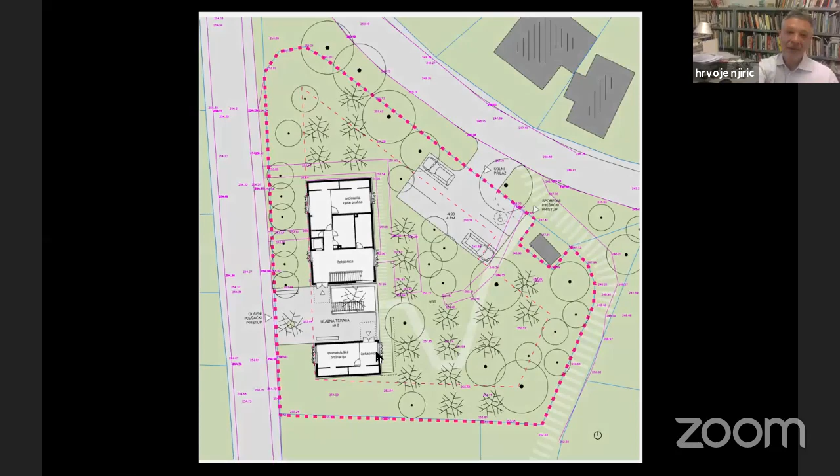This is the big house with the whole program. We'll cut out this part, make a public space, and then go down into the garden. We call it Villa A, Villa Ambulanta, because the program said to make it as much like the villas in the outskirts as possible—make it as residential as you can.

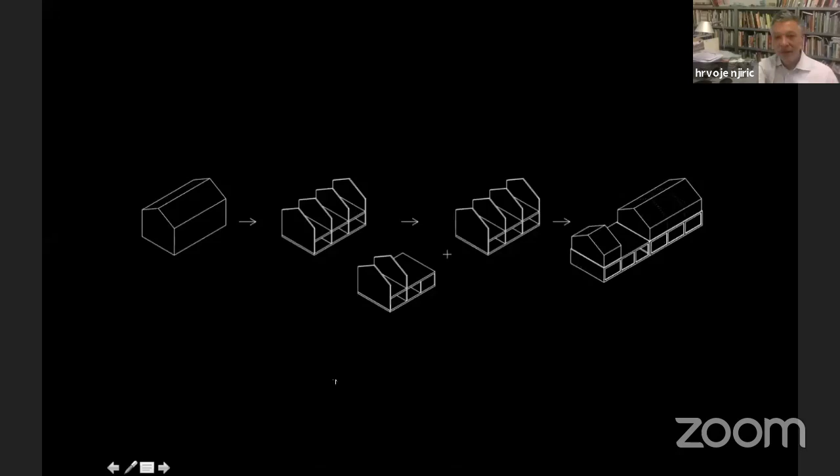We also wanted to mimic the scale of the existing building. So we kept the existing one, added this new one, and added public space with a staircase which leads you into the garden. This is the idea of keeping the old structure and adding the new one. It's a very simple project.

This is the public staircase that goes through the house. For students, it's also important to study projects that allow people to go through the house without necessarily entering it. Take, for example, James Stirling's museum in Stuttgart—it's this kind of example.

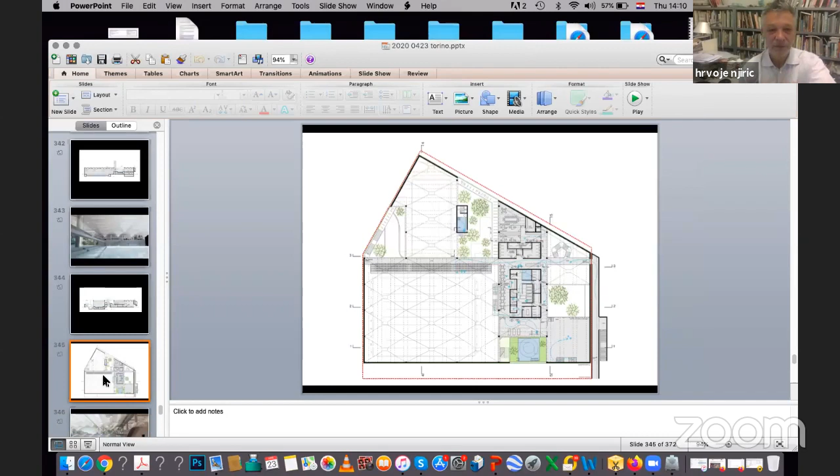Doesn't want to go on. I don't know what happened. Sorry. Something happened—the program crashed. We have a few more slides to see.

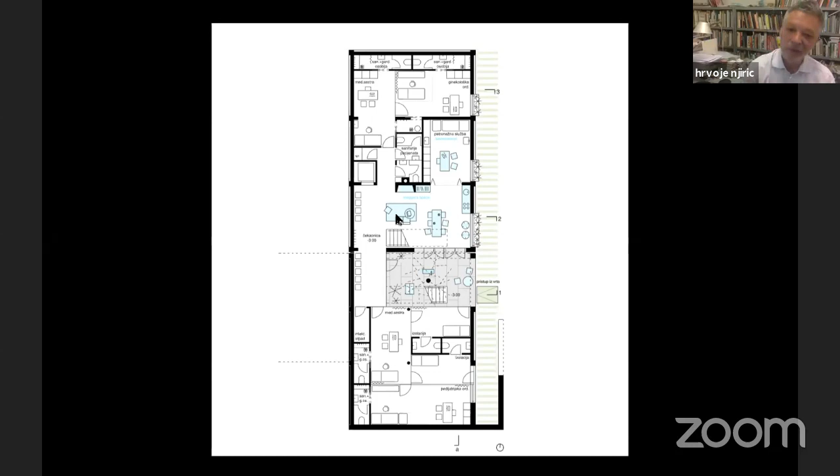Actually, the building was mostly influenced by visiting the famous Eames House in Pacific Palisades in LA, which has two houses—one for the studio and one for the family—with an atrium in between. It was an influence where I said I'll make the house for my son and the house for me, and we'll eventually meet in this space in between.